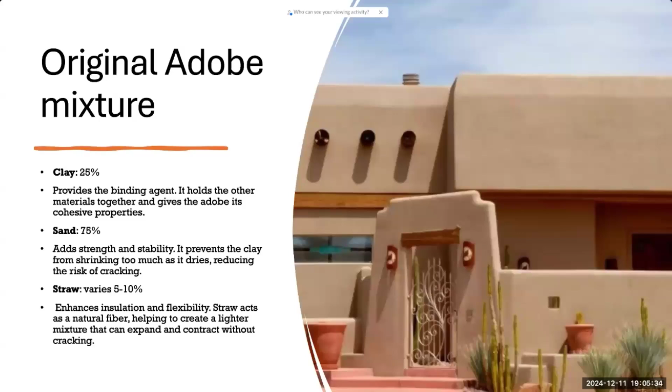So what is R value? It's kind of like a superhero power for building materials. The higher R value, the better a material is at keeping heat where we want it. A high R value means it can block heat from coming in during the summer and keep it in during the winter. Now let's talk about Adobe and compressed earth blocks. These are great materials, but they don't have super high R values. This means they don't block heat as well as some other materials. So while they're great for many reasons, like being eco-friendly and strong, they might not be the best choice for keeping your home super warm or cool.

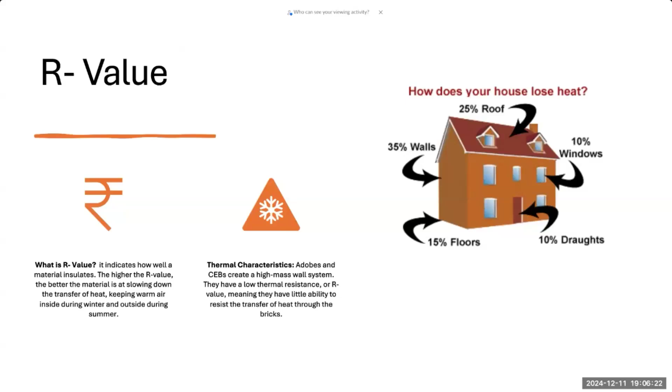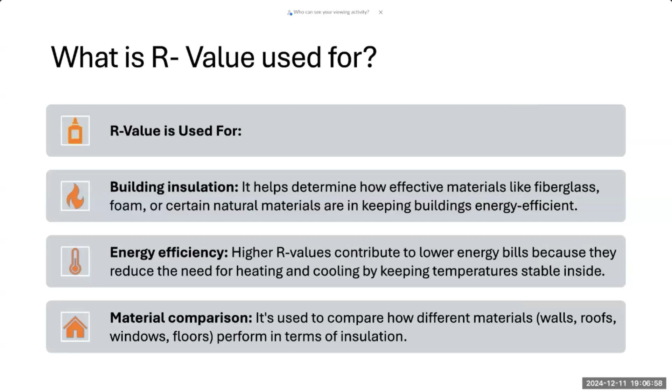We use R value to first pick the best stuff. We can compare different materials like fiberglass, foam, or even natural materials to see which one is the best insulator. Second, we can save money. A higher R value means less energy is needed to heat or cool our homes. So we can save our money on our energy bills. Third, build smart. So we can use R value to choose the right materials for walls, roofs, windows, and floors to make our homes as energy efficient as possible. The super adobe is a modern twist on an ancient building technique. It uses a special mix of mud and lime packed into plastic bags.

So these bags are then stacked and held together with barbed wire. This method makes building very strong, especially against earthquakes.

For example, there was a house in 2017 in Mexico that survived an earthquake of 7.1 magnitude. Adobe also lets in plenty of light and air and can help keep homes cool in hot weather. But while Adobe is great for many reasons, it's important to note that it doesn't insulate as well as some other building materials, so it might not be the best choice for very cold or hot climates.

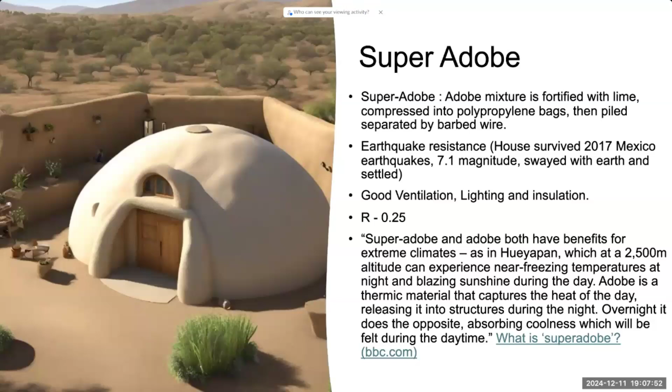Hyper Adobe is a modern take on traditional Adobe construction that offers several advantages. By incorporating lime into the Adobe mixture and compressing it into special fabric bags, this technique creates a strong and durable building material. One of the key benefits of Hyper Adobe is that it's affordable.

The use of these less expensive bags reduces the overall cost of construction. Also, Hyper Adobe structures are remarkably resilient. Why is that? They can withstand extreme weather conditions, including floods, fires, hurricanes, snowstorms, and high winds. This makes Hyper Adobe a suitable choice for building in regions prone to natural disasters.

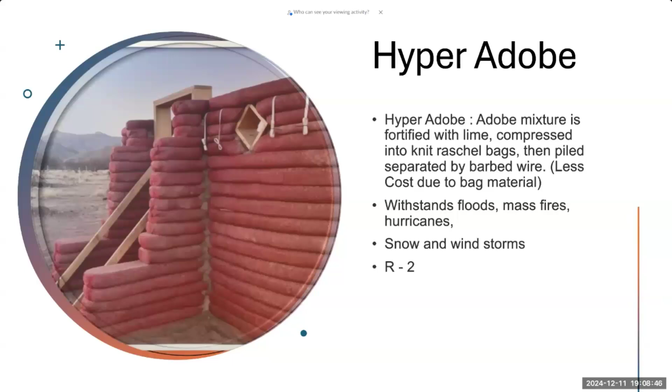So why experiment with Adobe mixture ratios? It's for cost effectiveness, strength, durability, longevity, and health and environment.

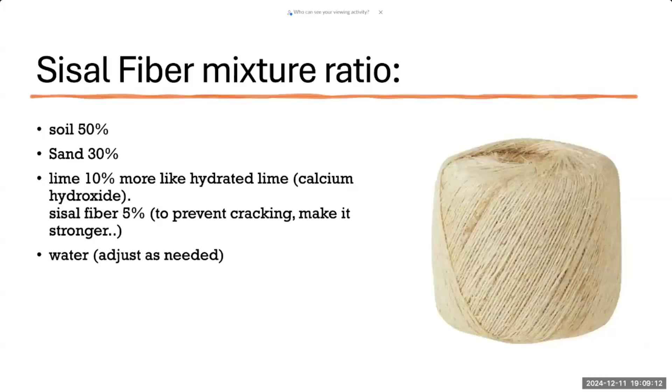Our first mixture ratio is going to be with sisal fibers. Here we have 50% soil, 30% sand, 10% lime, and water as needed.

More about sisal fiber: it's a natural fiber extracted from the agave sisal plant and can significantly improve the properties of adobe, a traditional building material made from clay and water.

The benefits of sisal fiber reinforcement include increased strength, as the fibers bind clay particles together more tightly, making the adobe stronger and more resistant to cracking. Improved flexibility: the fibers add flexibility, enhancing the adobe's ability to withstand seismic activity and other stresses. Enhanced durability: the fiber's resistance to moisture and rot helps protect the adobe from deterioration, extending its lifespan.

The way it will be incorporated into the adobe is to cut the sisal fibers into short lengths, mix the fibers into the adobe mixture during kneading, and mold the mixture, allowing it to dry slowly. By incorporating sisal fibers, builders can create more durable and resilient adobe structures.

Next we have the volcanic ash mixture. Here we have 40% soil, 30% sand, 10% lime, and water as needed.

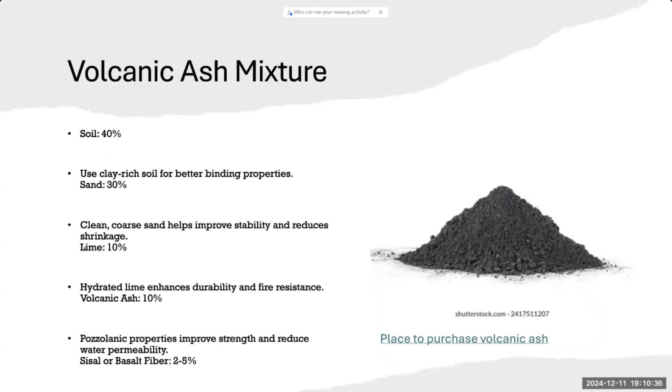More about this mixture: volcanic ash is a fine-grained material produced by volcanic eruptions and can be a valuable addition to adobe mixtures. When incorporated into adobe, volcanic ash can significantly enhance the material's properties.

Some of the benefits are increased strength, as volcanic ash fills the voids between clay particles, creating a denser and stronger matrix. Improved water resistance: the fine particles of volcanic ash can help reduce water absorption, making the adobe more resistant to moisture damage. Enhanced thermal insulation follows.

Volcanic ash can improve the thermal insulation properties of adobe, helping to keep buildings cooler in hot climates and warmer in cold climates. The way this will be incorporated into adobe is to mix volcanic ash with the clay and water to form a homogeneous mixture.

The optimal ratio of volcanic ash to clay can vary depending on the specific properties of the ash and the desired characteristics of the adobe. The mixture is then molded into bricks or directly into the wall and allowed to dry slowly.

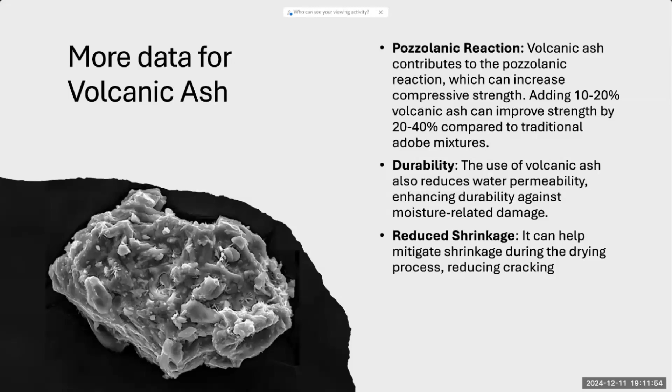More about the basalt mixture: it's a volcanic rock as well, which can be crushed into a fine powder and added to adobe mixtures to enhance its properties.

Some of these strengths are, like the others, increased strength—basalt's hardness and durability contribute to its increased compressive strength and resistance to wear and tear. Improved water resistance: basalt can reduce water absorption, making the adobe more resistant to moisture damage and freeze-thaw cycles. Enhanced thermal mass: basalt can increase the thermal mass of adobe, helping to regulate indoor temperatures and reduce energy consumption.

The way this would be incorporated is to crush the basalt into a fine aggregate, then mix the basalt aggregate with clay and water to form a homogeneous mixture. The optimal ratio of basalt to clay can vary depending on the desired properties as well.

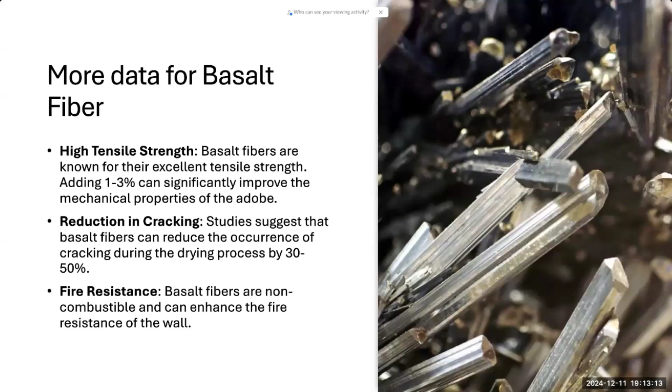Thank you, James. In addition to the homogeneous materials, we will be adding a plaster made out of natural lime. The ingredients to make this plaster will be 1 part coarse sand, 1 part lime, and 1.5 parts sand, plus clean water. We'll be adding 1/2 inch of thickness to the adobe wall.

In addition to the plaster, we'll be integrating chicken wire to these homogeneous mixtures. Why add a high thermal conductor that will just increase thermal transmittance of materials in the wall, causing an increase in U factor, resulting in a higher rate of heat transfer.

We're using this because it will allow this wall to be stronger, and all these mixtures will stick better and stay in place, making it less likely to fall off or weaken here in California during an earthquake.

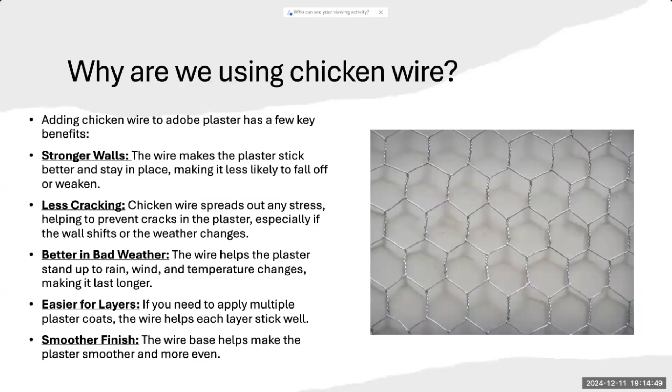Chicken wire will spread out any stress, helping prevent cracks inside the plaster, especially during seasonal changes between hot and cold. This will hopefully increase the lifespan of our walls. By adding this, each layer will adhere to each other more cohesively, making the plaster a smoother and more even surface.

In order to dry these materials, we have to keep the wall between a 68 to 86 degree Fahrenheit environment. We must avoid extreme heat. Anything above 95 degrees Fahrenheit will cause rapid drying, leading to cracking.

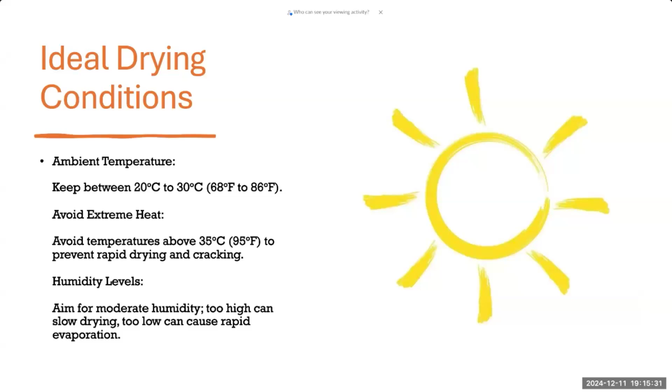We must also be aware of our humidity levels. Too high of humidity will cause a slow drying process, or too low of humidity will cause rapid evaporation. But to help us control these variables, we will be using a tabletop oven that will allow us to control our temperatures so they will not exceed 95 degrees Fahrenheit. Our timer will allow our humidity levels to vary between how long we keep these materials inside the oven.

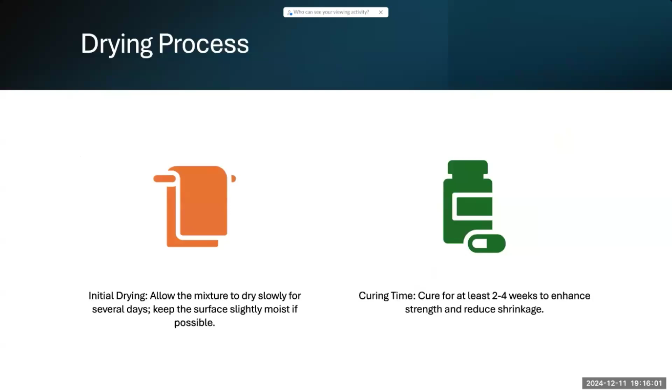Up next will be Koi with our stress test for various Adobe recipes.

Thank you, Josh. For this project, we are going to conduct a couple engineering tests, and the stress test is one of them. We're going to test the block's actual compressive strength. We're basically going to flip the block to its side and put it under pressure and wait until it cracks, then measure the PSI per square inch to see how much each block can handle. The goal is to create a block that can withstand earthquakes and minor disruptions in Southern California.

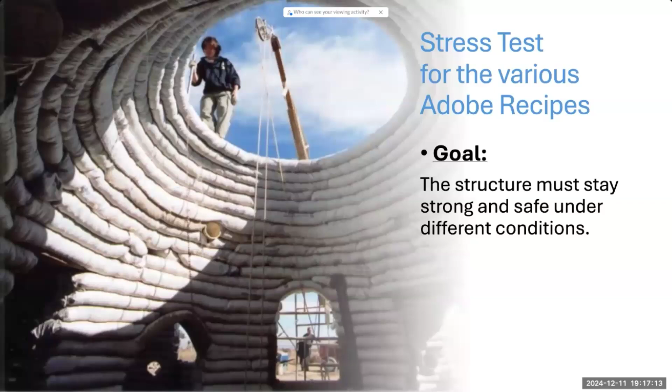Another thing is the hydraulic binders that we could combine, like cement and lime, to strengthen and improve the compressive strength of these blocks. Like my teammate said, we have volcanic ash, sisal fibers, and basalt fibers. Those all help with the compression and strength of the block once they're dry.

The impact test that we're going to be conducting will assess the durability and resilience of each block we create for each recipe. The drop weight test: we're going to drop a certain amount of weight on each block until it cracks. Then we're going to do the pendulum impact test.

This will allow us to see the impact of something running into it, for example if the mass wall is near a street or a car hits it. This will show how much damage these bricks and blocks can handle before failure. Once we do the pendulum test, we're going to check the amount of energy absorbed, and then check how much of the block is cracked.

We're going to measure the crack, what type of crack it is, whether it's a shatter crack, a straight line crack, or a fracture, and then go from there to see how much more it can handle before it fully fails.

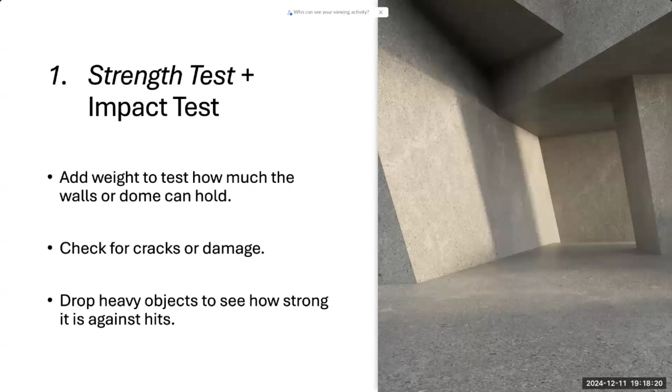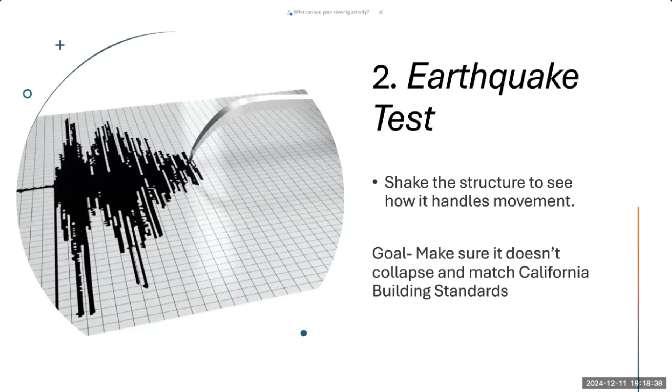We would like to actually do an earthquake test, but we don't have the materials or programs to simulate that at the moment. So if we get access to that, that would be nice. But at the moment we're trying to figure that out. It's a test that needs to be done here in the state of California to make sure the mass wall stays in one piece and doesn't fail.

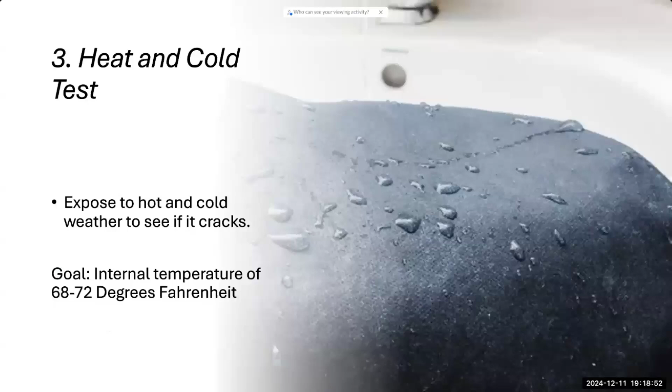The heat and cold test: Adobe's not very good at being cold. It actually absorbs heat. So we're going to measure how much heat it's going to take on a standard Adobe block, which is a 10 by 4 by 14 block. We're going to plan on heating up one side and see how long it takes to reach the other side of the block by measuring the heat in Fahrenheit with thermometers and thermal imaging.

Another test we would like to do is the miniature wall with the interior wall, to see how long it takes for the heat to reach the gypsum board. And the cold test: basically what I would like to do is get it to freezing temperatures and see how hot or how cold it could get before it cracks and fails.

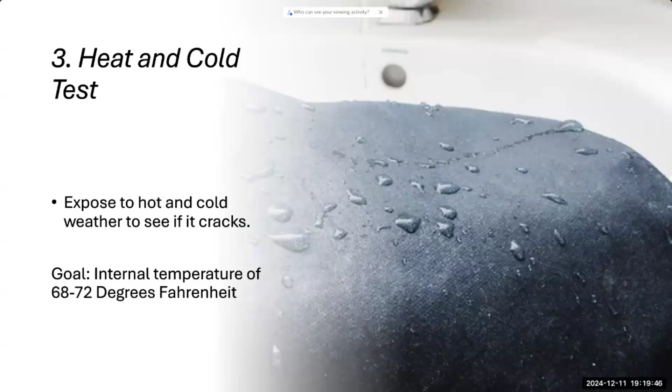The heat test is another thing — we're going to heat up the block until it cracks, and we're going to videotape it as it heats.

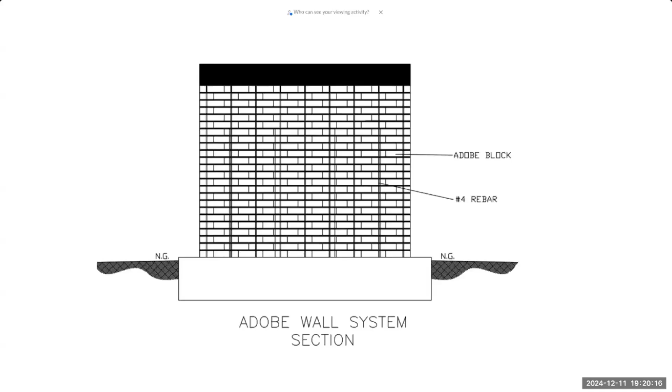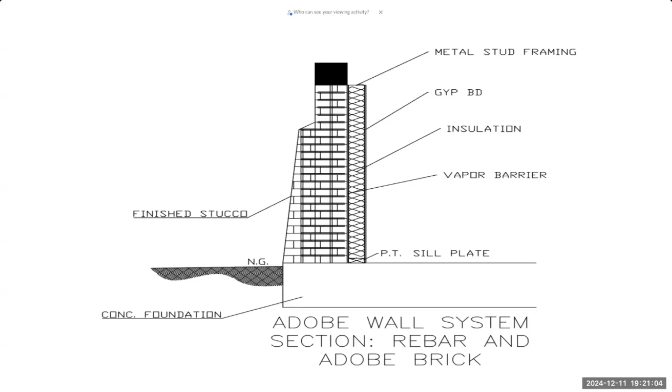So here's the side view again, but with the Adobe brick and the rebar inside. You can see the metal stud framing, the gypsum board, and the standard insulation. You can use fiberglass or spray foam if you want — we're sticking with fiberglass because it's cost effective. The insulation and vapor barrier inside will help keep the moisture between the interior wall and the mass wall.

And here's the stucco finish. The stucco will actually help waterproof and protect the Adobe blocks, because Adobe is not waterproof and not water resistant due to the clay and sand. But with the new type of blocks we're trying to create, and our recipes, we're hoping to create a water resistant or possibly stronger Adobe block to help building costs here in the state of California.

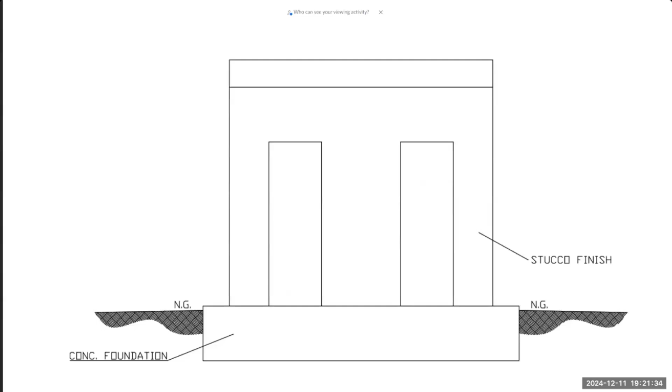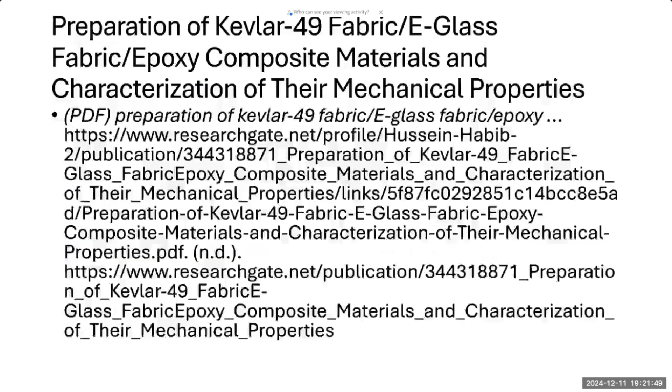And that concludes our presentation.